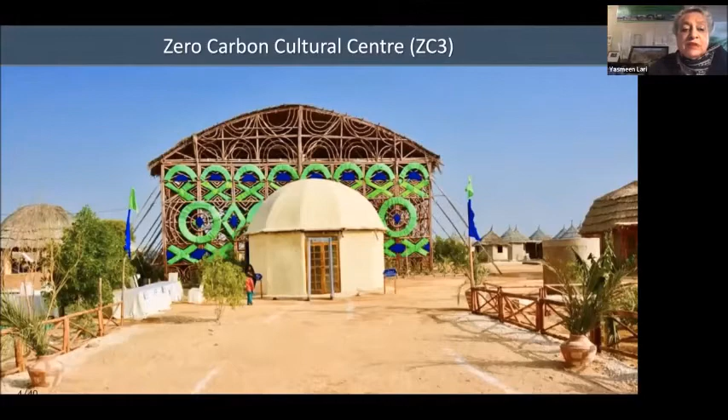The rare gathering of distinguished architects and academics, as well as students of architecture from all parts of Pakistan, was made possible due to the facilitation provided by IAP and PCATP.

The delegates spent 2 hectic days at the 4-acre zero carbon residential campus situated at the foothills of Makli World Heritage Site. I'm delighted that several of our distinguished conference delegates have joined us today.

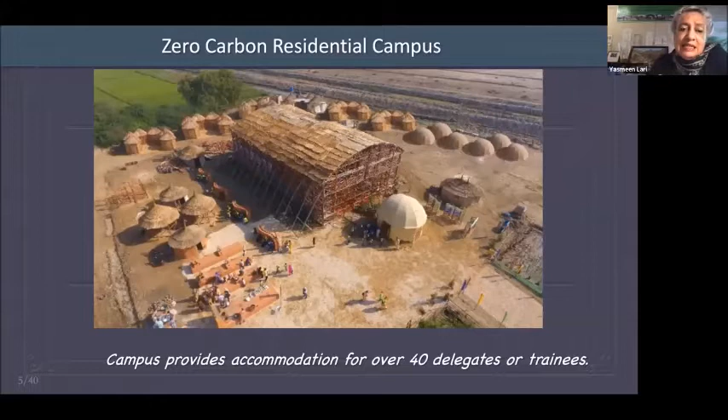Many delegates stayed overnight in the zero carbon ensuite bamboo lodges. Their conical thatch roofs are drawn from classical desert huts, as you can see. The log accommodation, known as Lari Octagreen, is based on octagonal modules assembled in the form of a beehive. They're very easy to link together. And so this is what we do.

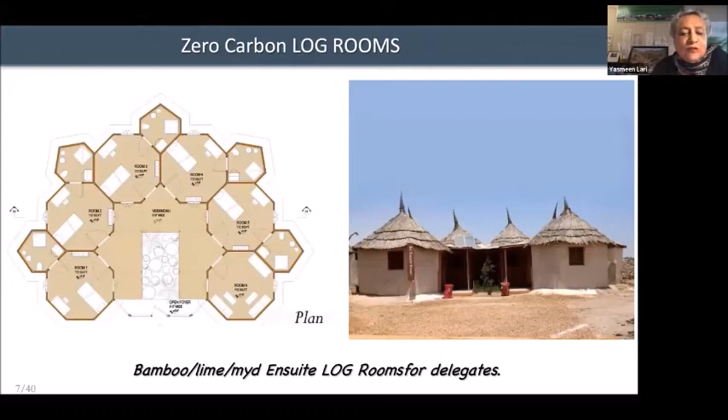We use this particular form to make many different kinds of configurations. Since the number of delegates exceeded the original number, we had to build another 24 rooms very quickly. The Igloo form fitted with prefabricated bathrooms provided speedy construction, and you can see what it looks like.

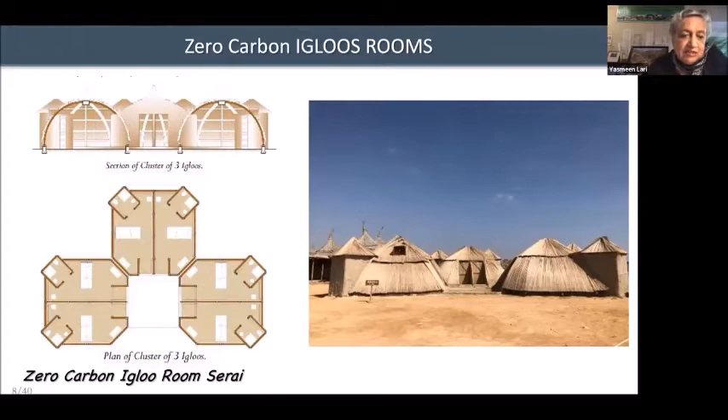This form has been developed over time working in bamboo and trying out many different formats. The formal sessions were held in this 60-foot wide, 80-foot long, and 30-foot high bamboo marquee at the Zero Carbon Center.

On this occasion, papers on the theme of green sustainable architecture and heritage management were read by eminent national and international experts. We had a real treasure of papers read out at the time, and everybody interacted, discussing topics of mutual interest relating to zero carbon and the role heritage management can play.

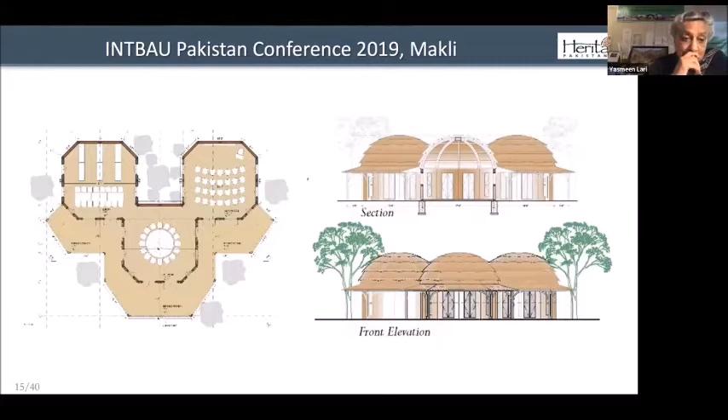First, the Jane Drew Award was a highly gratifying event for me, where the 4-hour program, impeccably curated by Architects Journal and Architectural Review, was attended by an assembly of select audience including several W Award laureates, as well as architectural and media luminaries.

The topics of my presentation ranged from zero carbon methodologies for co-building and co-creativity, to the importance of design in improving the life of impoverished communities.

A couple of weeks earlier, I had the rare privilege to be invited to address audiences at both the Victoria and Albert Museums, located in Scotland and in England.

The RIBA Vitr4 lecture was held at the V&A Dundee, seen on the left - a spectacular, soul-lifting contemporary venue, if you are familiar with Kengo Kuma's designs - where I was able to discuss my barefoot social architecture, or BASA, at great length.

Then, in London, the joint RIBA, INTBAU, and V&A lecture was organized by Chloe Lowe, Harriet Wennberg, and Laura Jones, and moderated by Harriet, where I discussed engagement of mendicant communities - those who are begging in sites such as the Makli World Heritage Site.

This was really a most magnificent setting that I could be in at that time, dating to the 19th century. And it was Juliet, who is with us today, thanks to whose resourcefulness I got there on time.

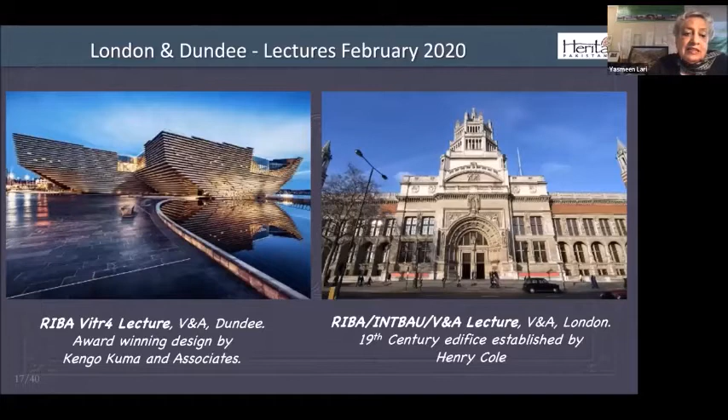The event provided me the opportunity to expand on the value of barefoot social architecture, that is BASA, along with the need to adopt non-engineered structures, which are safe, sustainable, and easily constructed.

I am pleased to see that Jyoti from INTBAU India has joined us, who also attended the event at that time. There are so many topics that need to be of concern to us as design professionals.

Rising disparities around the world, global warming, climate emergencies, recurring disasters, climate migrants, and conflict-impelled refugee camps, along with now the impact of COVID-19 pandemic on architecture and urban design. We really have to now think about our role and how strongly we can actually be working on all these particular disasters that seem to be happening all the time and are becoming part of our lives.

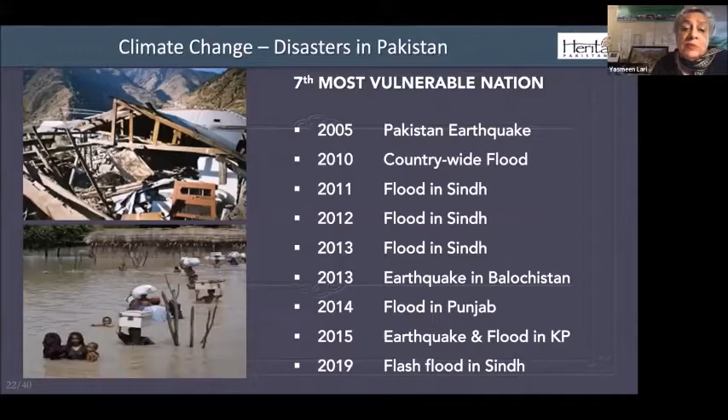And you can see that this is the way we are trying to deal with all the 3 aspects I've discussed earlier. Now we know that the present world order has created soaring inequalities and accumulation of wealth among the 1%. If you're familiar with economist Thomas Piketty's book, Capital in the 21st Century, you'll know what I'm talking about.

And then there is the deprived state of lower echelons, which is again, through great research by Wilkinson and Pickett, you can see in their Spirit Level how important it is for us to understand the inequality that exists.

So I would like to ask the question that I raised in my lecture at the Royal Institute of British Architects at 66 Portland Place in 2016, and have since raised in almost all gatherings of architects around the world. The question is, should architects continue to be an instrument in the hands of just that 1%?

Think about that. Think about that. Or can architects spearhead a movement for addressing the plight of the lower echelons, at the same time prevent the depletion of the planet's resources?

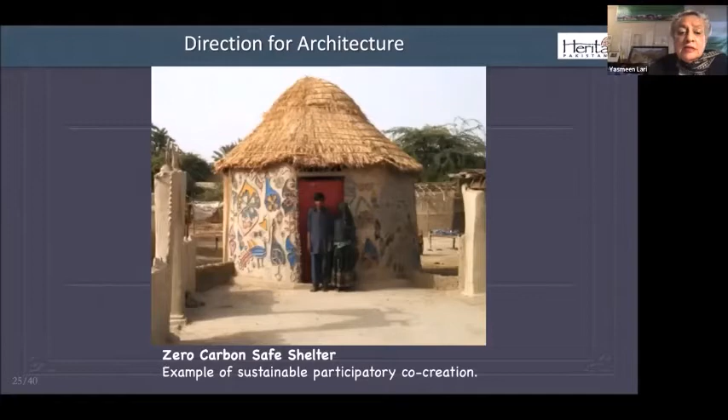Today, there are several movements aiming at a changeover to more sustainable future lifestyles for humankind. There's transition design and degrowth movements gathering momentum in the West, while my own barefoot social architecture, BASA, aims at social and ecological justice for the disadvantaged.

These are all movements that we have to be looking at very seriously, because they are all trying to see how we can bring about sustainability in the way that we are now moving forward.

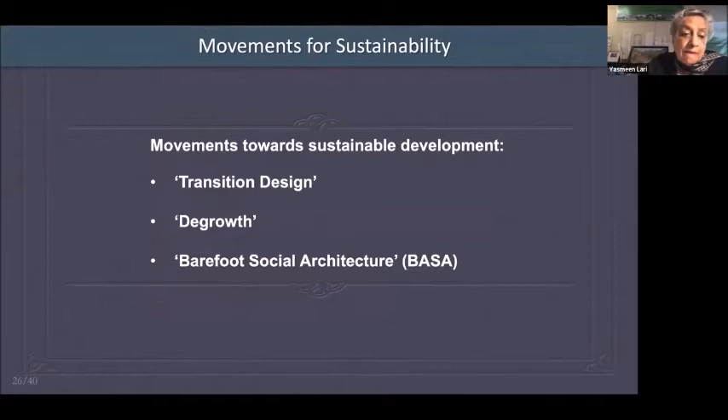Now you can see that by utilizing BASA principles, Heritage Foundation has been able to provide humanitarian assistance to 840,000 people over 8 years. That's over 100,000 persons per year.

By using green sustainable methodologies, it targets 12 out of 17 sustainable development goals. And it is possible at a very low cost, if we have co-production and co-creativity and we work with people themselves.

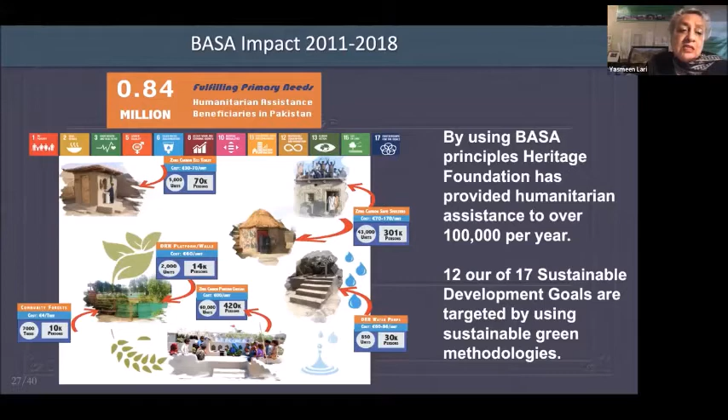So the struggle for ecological justice and sustainable alternatives now has the addition of another imperative: readying ourselves for dealing with the post-COVID-19 world.

A virus that has equalized the social system. It does not differentiate between the haves and the have-nots. It does not guarantee life because of your status or wealth, or how many designer objects you might possess.

It reminds us that we need to take up the guardianship of Earth's resources seriously and pursue design in the service of an equitable world.

It is with this background that architect Murad Jamil and I felt that there was a need for a network of architects interested in collaborating with each other to develop alternative ways of practicing architecture.

The Zero Carbon Architects Disaster Management Network, or ADMAN, seeks to develop design alternatives for preparedness, prevention, and management of disasters, utilizing zero or low carbon sustainable methodologies.

The intent is to enable vulnerable communities to withstand foreseeable natural and human-made disasters.

The network will welcome architects, students, and other humanitarian professionals in helping develop alternative designs using sustainable materials and non-conventional techniques for architecture and urban design for disaster preparedness and post-disaster development. It will also create a liaison mechanism with professional organizations and academic institutions.

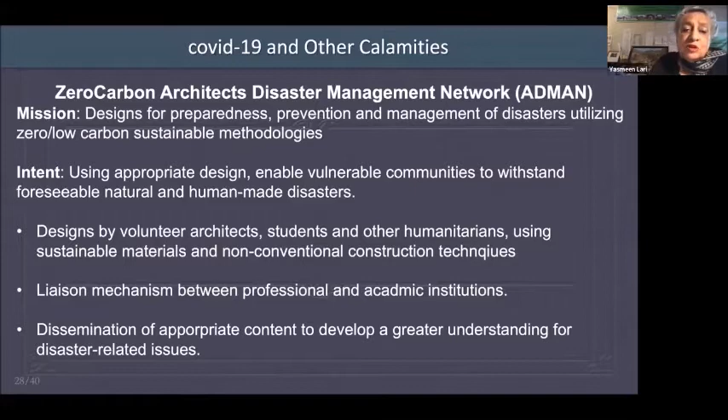Now, as a response to the COVID-19 emergency, we have designed prefabricated camp structures for quarantine, isolation wards, and sanitation. These are modular structures utilizing prefab bamboo panels, which can be fabricated and erected very, very quickly.

These are structures built with specially designed panels, which have been used extensively in my designs in the past, and which are both flood and seismic resistant. Bamboo is really used in many countries - many architects are familiar with it, but I think it needs to be spread as much as possible.

These are low-cost modular elements that are quick to fabricate and can be speedily assembled with limited workforce. So there's the quarantine unit you see on the left top, and that's like a tent, but very quickly put up. The one at the bottom has an attached bathroom with it.

Of course, the one on top can also have a bathroom, separately built as a kind of prefab bathroom. Then you see a 12-bed ward, again a modular structure which can be built very, very quickly. On the top right, you see the prefab bathroom, and on the bottom right, a wash stand also made out of bamboo.

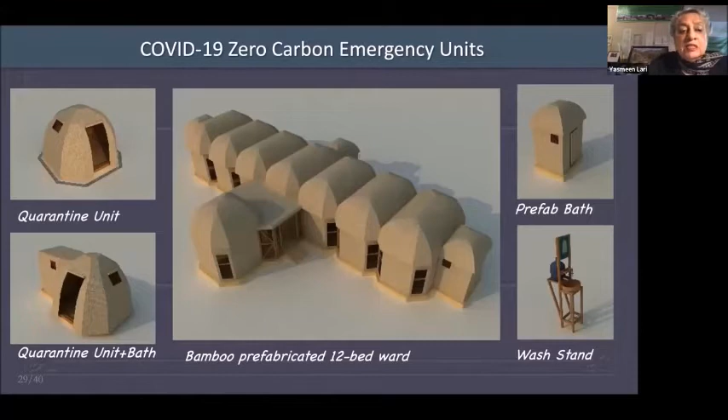Now, the single prefab quarantine unit is built with curved bamboo joists and clad with jute fabric. These are ideal for isolating a family member in the crowded habitat of the poor.

You can see it's the octagon, and these are the joists that have been curved. They immediately create it, and they are all prefabricated, brought to the site and just assembled together. Something like 4 people can actually build about 4 of them in a day, so it's very quick to put together.

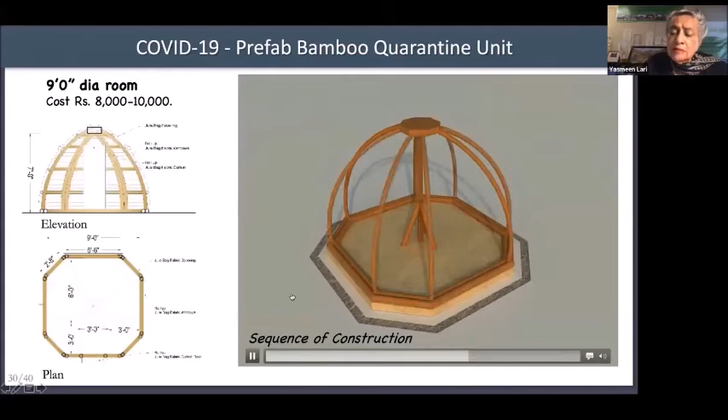If you look at the animation here, you'll see how this whole thing works. First you make a base, all lime concrete. The bamboo pieces can be assembled elsewhere or on the site. After putting a beam at the bottom like a plinth beam, you start putting on the various joists and attach purlins to it, and that's all you need to do. It's very quick, and then you can cover it all with a jute fabric or any other material. My architect did this rendering, which is a little dark, but you could have any color you want.

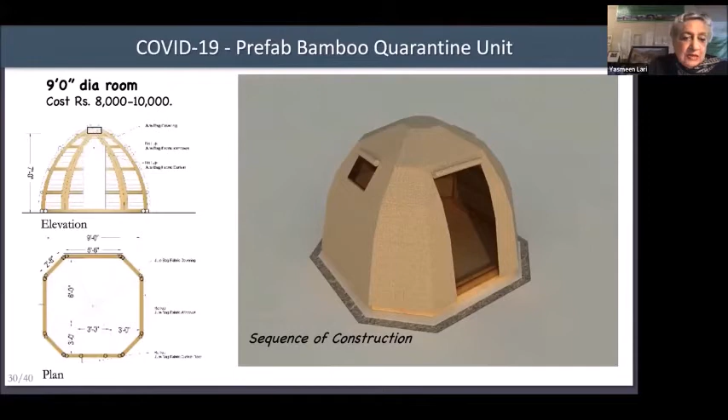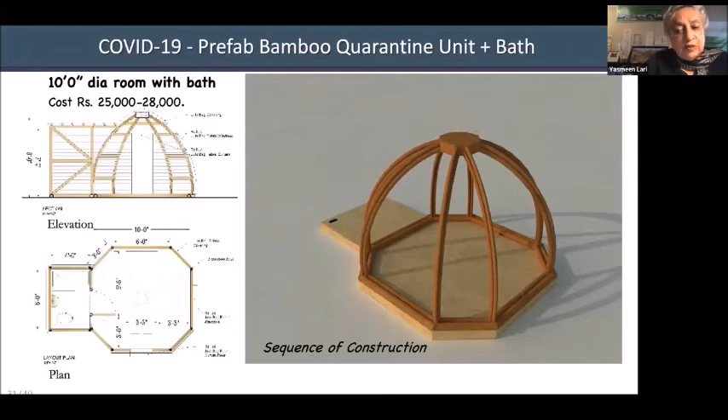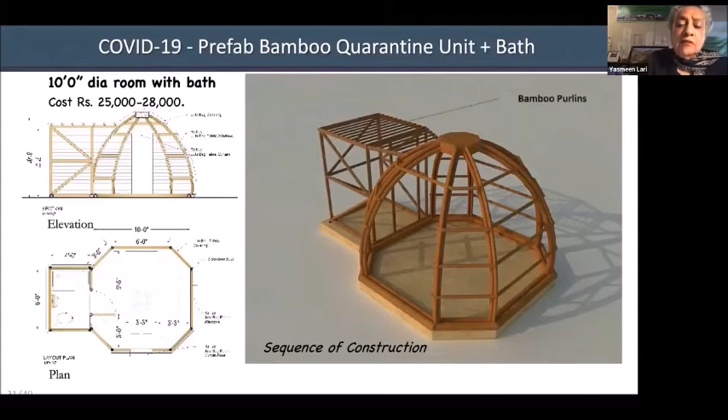The next one is a single prefab quarantine unit with an attached prefab bathroom that can also be built very speedily. If you look at the animation, it's really the same system: the prefab panels are brought in, and the bathroom can be built again very quickly attached to it. These are all methodologies that provide low-cost solutions using expertise from people who are non-literate but can learn it quite quickly. This costs only about 25,000 to 28,000. I think the earlier one cost about 10,000 or so.

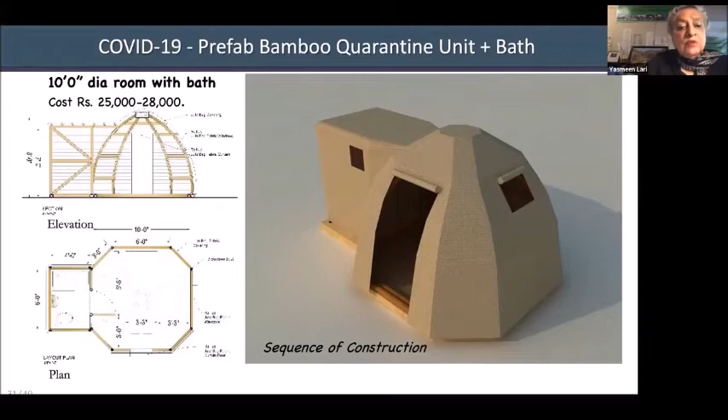The next one is a bamboo prefabricated modular 12-bed ward with prefabricated changing rooms and bathroom attached for patients and healthcare personnel. The plan shows the configuration. At the bottom you see the changing rooms and the entrance where the arrows are. You go into the lobby where you have the nurses station, then 6 beds on the right and 6 on the left, with bathrooms attached, and behind the nurses station you have the toilet for the staff.

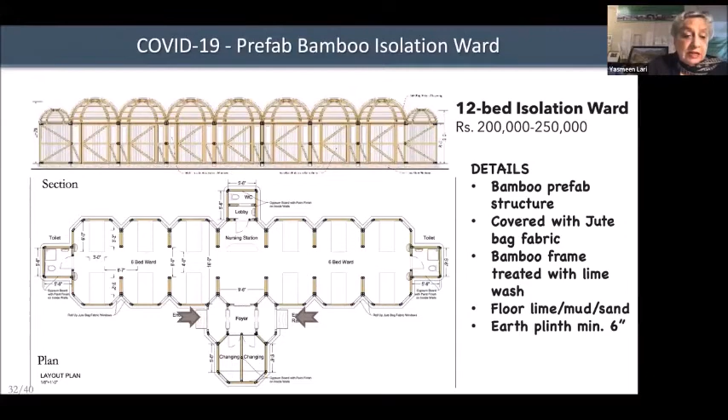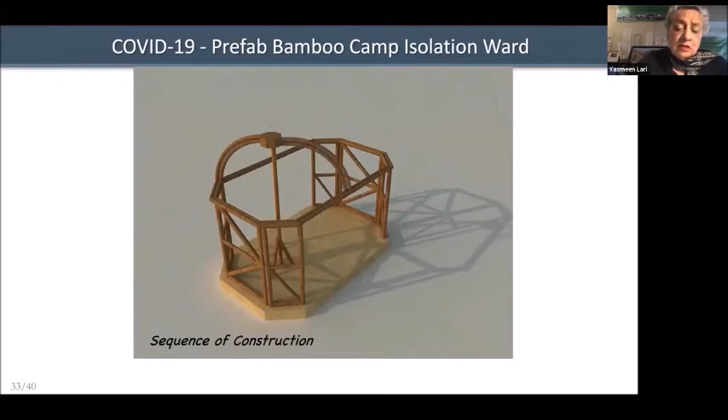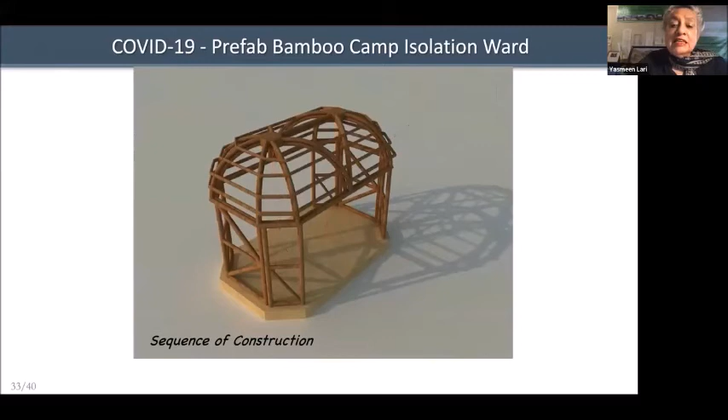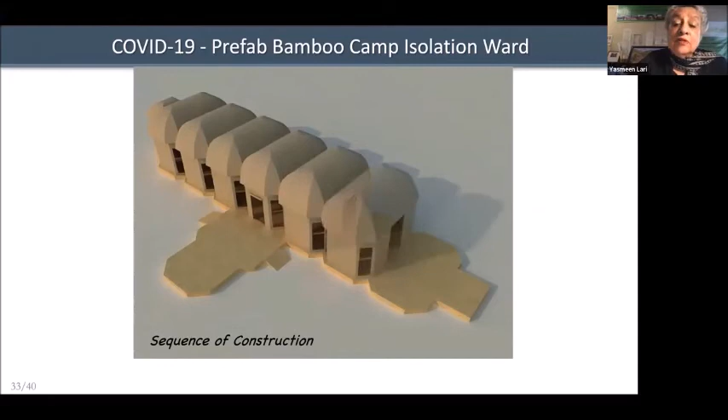In the next slide you'll see the animation showing the sequence of construction for the ward. This again is based on a lime concrete plinth and flooring; we don't use any cement at all. These are the prefabricated panels brought to the site and put together with ring beams, and again construction of the curved joists that are bolted to the ring beam. In this case there are two of them joined together, and then the purlins join the whole thing. You can finish them off with fabric, jute fabric, or if you want them permanent, you can use matting with lime and sand or lime and mud plaster. So you lay out the plinth and floor, then keep putting up the modular units, and this goes quite quickly.

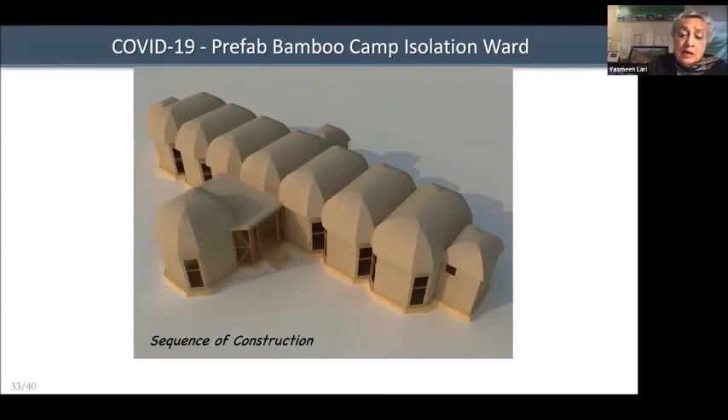Now we'll move on to the bathroom, which is so important, and we've learned it's something all of us must have. As I mentioned earlier, millions are needed in the country. I'm hoping that after this COVID-19 experience, the government will make the effort so everybody gets a bathroom. I think sometimes because it's women who wanted it, there's not much emphasis on it, but to give dignity to women, we must have bathrooms for every family.

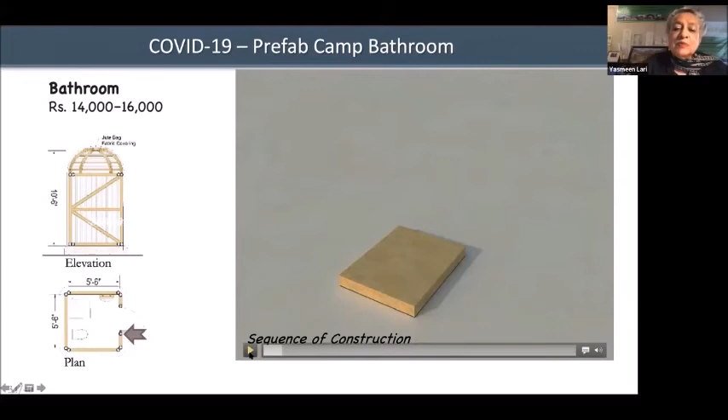So this is the sequence of how this can be put together. It's again very quickly made with the same prefab panels joined together, and then the same kind of roof can be placed. Roofs can be of any kind, conical or domical. We now have many different ways of making the roofs.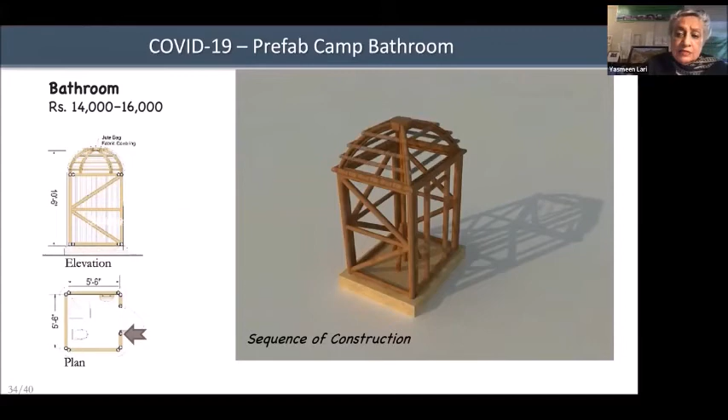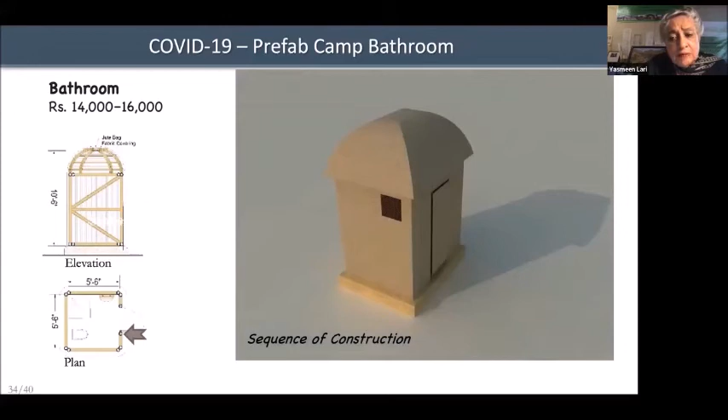This you can see again is the same technique. Since hand washing is essential, we've also developed a low-cost wash stand, which you'll see in the next slide. It can be transported and installed anywhere. It uses a lot of our products made at Makli by my women, especially the mirror mihrab and the basin, which is a terracotta basin. But this can be anything, and these can really be done very quickly and placed in position.

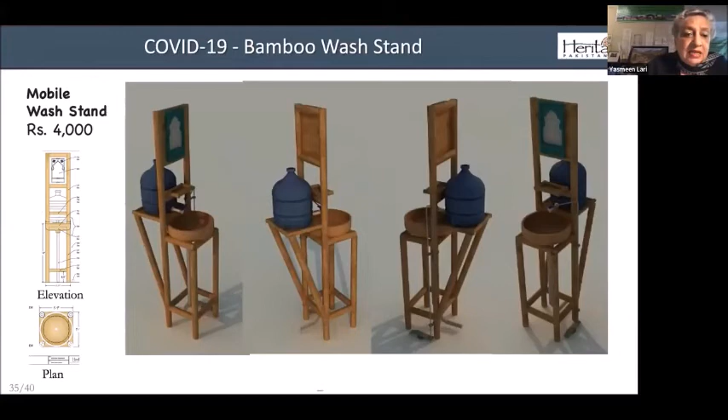Now the open source designs can be utilized freely. We have also developed online training tutorials for their fabrication and erection.

Now you see, this is the way the tutorials are. I'm sorry, you probably can't read anything, but there's so many of these slides, I thought it would take too much time. I just wanted to familiarize you with how it's done. Basically we always have a description, as you see on the top middle slide, and then drawings to show how the whole thing is designed. Then a whole list of all the tools needed and all the materials needed. So these introductory slides talk about what you need before you can start.

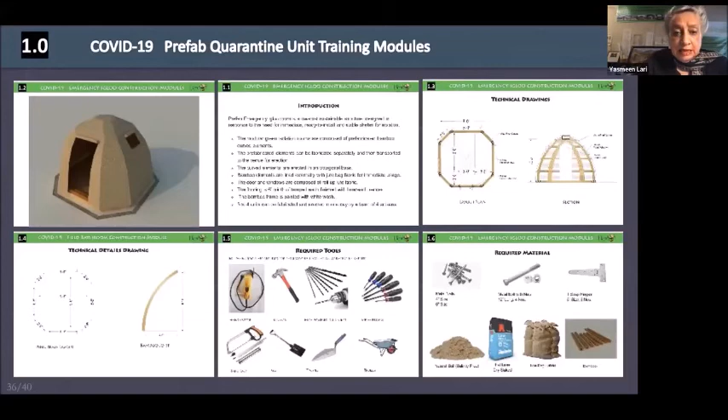As we go to the next slide, this tells you how you can prefabricate the panel, because that's what we're doing, prefabricating these panels or joists and so on. So here, what kind of bamboo you need, how you provide the leaching for it, how you start making preparation for actually erecting it or fabricating it.

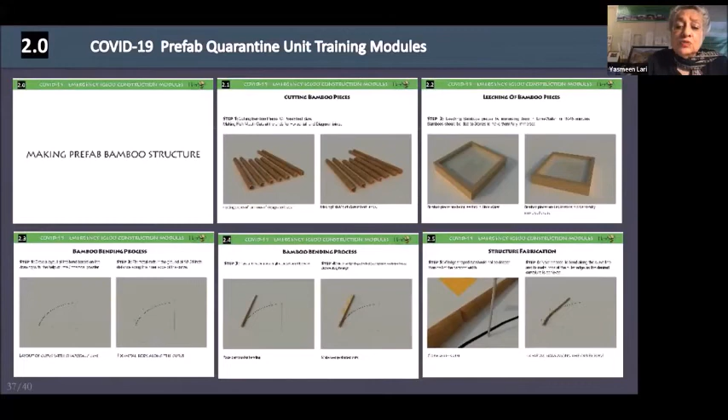The next slide goes even further to talk about how it can be put together. So it's always that you make all the elements, then you put them together to see that everything works, then you dismantle them.

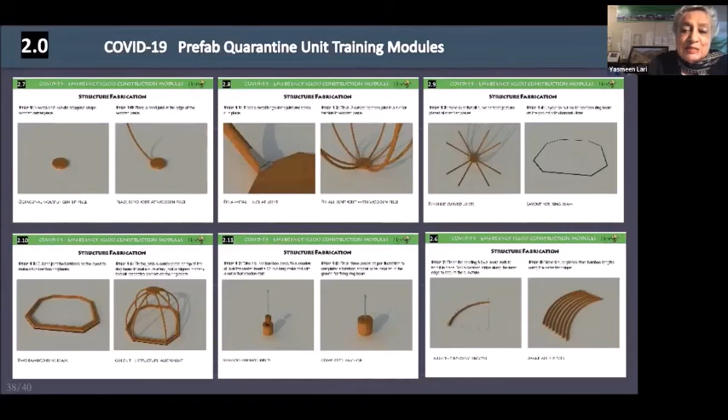And that's when you take them to the place where they have to be erected. So I feel that if this online training for fabrication and erection reaches architects who become aware of the need from the administration and would like to join the tutorials, it would help in spreading the methodology for immediate camp facilities. I'm very keen that architects should start using these materials, try to get a feel of them.

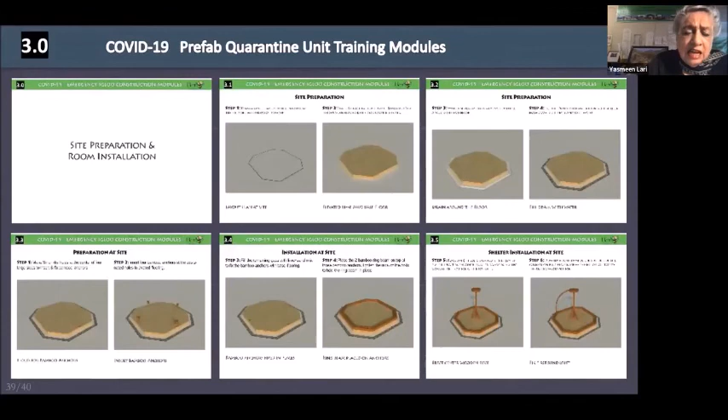And I think if you do, I'm sure you will love to use them because they are so easy. And again, they're zero carbon, so they will not hurt the planet. So this process of online tutorials that we have developed, we hope to provide a greater understanding of the use of bamboo, earth, and lime so that these could be used more extensively.

I have a few more points to cover after the slide presentation. I'm hoping that the experience of coronavirus forces us to pursue eco-urbanism, compelling us to look inwards to age-old solutions of our vernacular methodologies and medieval walled cities.

For example, minimizing the creation of autocratic, iconic edifices, instead using locally available sustainable materials to reduce densification of cities, as amply demonstrated by the spread of the virus in New York, by adopting many attributes of the walled cities of Lahore, where you can banish vehicular traffic, have walking streets, have open-to-sky terraces with your buildings, so the mental health of people who are locked in or locked out will have some respite.

And I think those are very good for women because they're good for children too, as I've done in my Anguri Bagh project, where you're able to come out at any level onto a terrace. So we need to pursue the much overlooked 24-hour cycle mixed-use development, integrating housing with commerce and leisure.

Now cities should become more manageable as more office workers begin to work from home. I think this is such a boon because now women can actually work from home and they will not have to go to offices, so they can juggle their triple burden. So I think it's a very good omen for women.